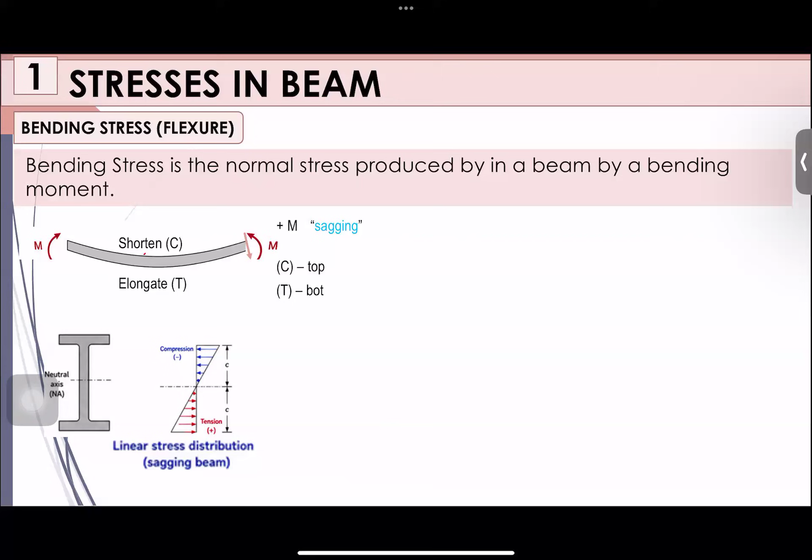A representation of our beam - we have sagging, where the beam is concave upward. On the upper portion of the beam, we have shortening, meaning the material at the top of the beam is compressed. While it bends concave upward, the bottom part of our beam is elongated or stretched.

This tends to be a tensile or tension side. So meaning, if we center on this, looking at the upper part of our beam, since it's compressed, that is compression at the top. Next, at the bottom of the beam, since it's elongated and stretched, that means that is tension. Hopefully that makes sense.

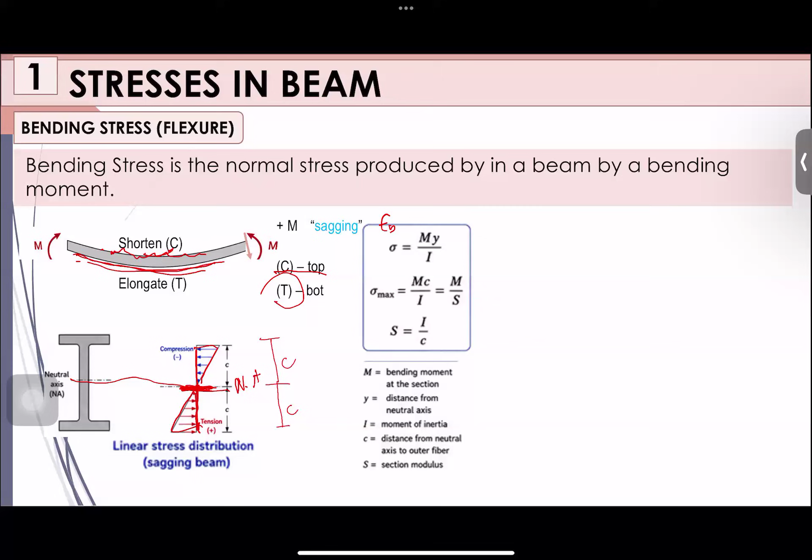So on the compression side, we have C. And also from the neutral axis to the outer fiber of the tension side, that is also a distance C. Your S there is your section modulus.

Based on the formula itself, we can say that when the value of our bending moment gets bigger, the stress gets bigger too. Make sense? Because the bigger the value for the moment, the bigger the value of the stress will be.

So in our actual design, it is very important for us to know where the maximum moment of our beam occurs. It's not just about knowing the length of the beam, or the support of your beam, or even just knowing the load of your beam.

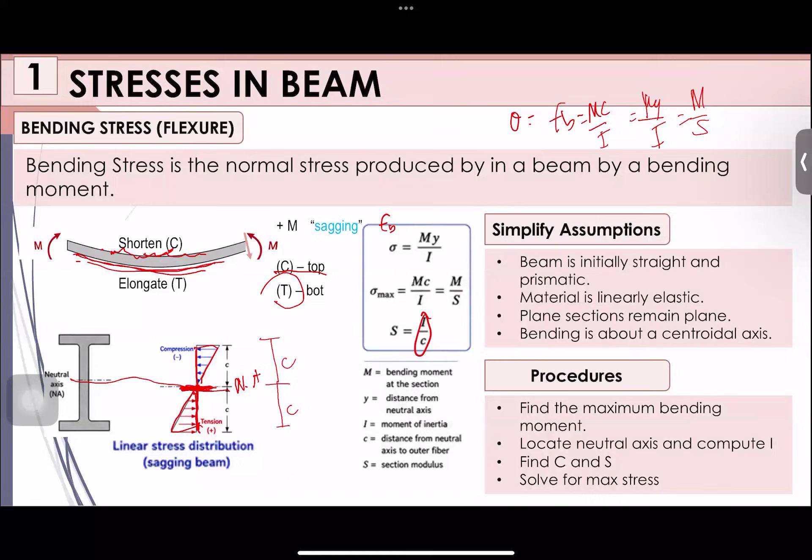Kaya because of the section modulus, pwede hindi maging mabigat yung section na gagamitin natin in engineering design of structures. Kapag hindi sobrang bigat yung material na gagamitin natin sa pagde-design ng structural members, doon na pumapasok yung tinatawag nating economical sections. Kasi as civil engineers, number one rule, kino-consider natin ang safety and welfare of the public. And aside from safety, kino-consider din natin yung pagiging economical at efficient. So we have here economic sections.

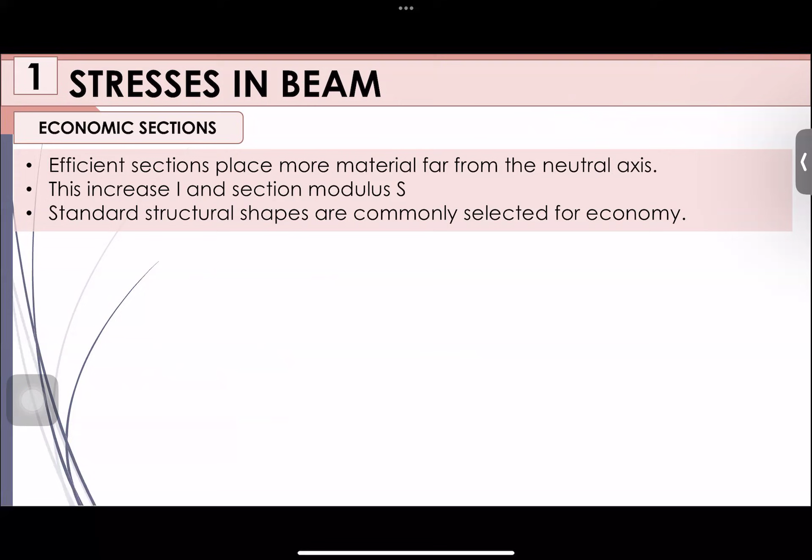Efficient sections place more material far from the neutral axis. This increases your I and section modulus S. Standard structural shapes are commonly selected for economy. So these are the different shapes for your structural member. The idea ng paglagay ng material na mas malayo sa neutral axis is para mas mataas ang kanyang moment of inertia. Kaya madalas ginagamit natin ay steel I-beams. Kung mapapansin niyo, yung mga flange ng beam natin is nasa upper section and lower section.

So again, yung flange ng beam natin, mas malayo sa neutral axis. At kapag malayo ito sa neutral axis, mas efficient, mas nare-resist nito ang bending kumpara sa beam na solid rectangular section, even though they are the same weight. Kaya I-beam mostly yung ginagamit sa ating construction. Kapag mas malayo sa neutral axis, mas efficient siya, at mas nare-resist niya yung bending kumpara sa solid rectangular section kahit pareho pa sila ng timbang.

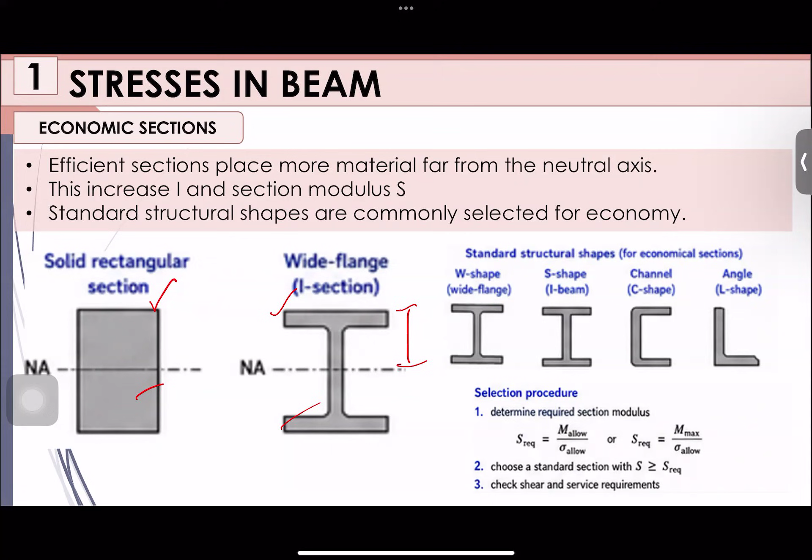Now let us try to solve some problems for bending or flexural stress. The simply supported beam shown in the figure has a rectangular cross section 120 mm wide and 200 mm high. So hanapin natin yung centroid. Rectangle yan, at ang centroid ng rectangle is h over 2, so 100 and 100. Compute the maximum bending stress in the beam. Compute the bending stress at point B that is 25 mm below the top of the beam. So first question, gamitin natin si FB. Hahanapin natin si FB max.

Number 2, no? Change natin yan, number 2. Number 2 is hanapin natin si FB or the bending stress at point B. So, paano ba natin gagawin yon? For us to know kung nasaan si maximum, first step natin dito is determine ano yung value ng moments natin. In order for us to determine the moments, gagawin natin yung shear and moment diagram. Tama? Which is yan yung ating topic before this one, topic 3 natin, the shear and moment diagram.

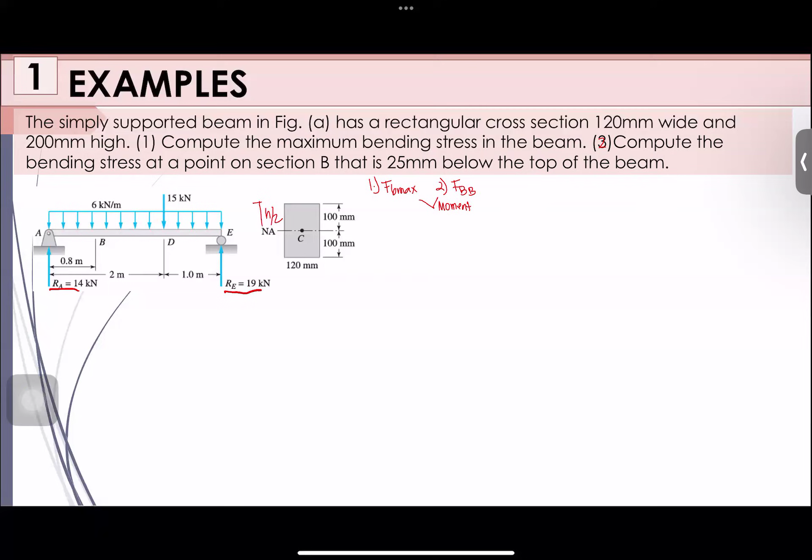So, sabi ko sa inyo, practice more problems on how to draw the shear and moment diagram, because hanggang theory ninyo magagamit ninyo yan. So, how will we draw the shear and moment diagram? Of course, solve the reactions first. So, you have the reaction at A at 14, and the other reaction at 19. To draw your shear diagram, I believe marunong na kayo nito. So, you have 14 upward. Kunin na lang natin agad sa point B na section.

14 minus 6 times 0.8. Minus because the force is going downward. Okay? So, that is 14 minus 6 times 0.8, and that is equivalent to 9.2. Now, next, at section BD naman, 9.2 minus 6 times 1.2, and that is equivalent to 2. Minus the concentrated load, which is 15. So, 2 minus 15, that is negative 13.

Run through tayo from point D to E. So, negative 13 minus 6 times 1, and that is negative 19. Negative 19 plus the upward reaction, 19, and that is 0. Therefore, that is your shear diagram. Next, let us try to draw the moment diagram. As you can see, kinakailangan natin ng specific moment at this point. So, how will we do that?

Kukunin lang natin yung area ng trapezoid na to. Kung nalilito kayo, pwede natin siyang hatiin in terms of triangle and rectangle. I-add natin yung area ng rectangle, i-add din natin yung area ng triangle. So, itong rectangle natin, at point B tayo ha, para madali tayo, para makuha na natin yung question number 2 mamaya.

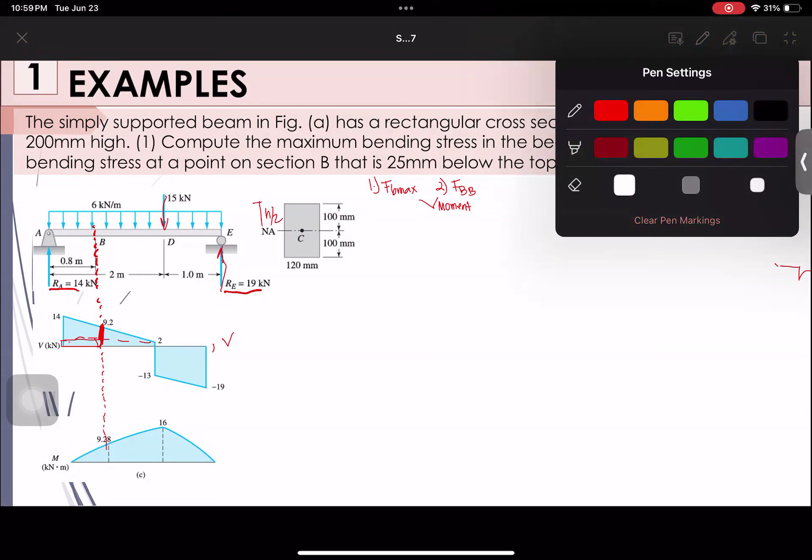Sige, I'm sorry. Nasobra ata yung paningin ko. Dapat nasa 9.2 pa tayo. Erase natin. Palitan na natin. So, nasa 9.2 pa tayo. This one, hatiin natin. This rectangular one is 9.2 times 0.8. 14 minus 9.2 for the triangle, so 1/2 times 14 minus 9.2 times 0.8. I-add lang natin yung dalawang area na to, and that is the value of our moment at point B. Yung value natin is 9.28.

Next, check lang muna natin yung values. I-add naman natin ngayon itong area from point B to point D. The same lang, this is a trapezoid. Para hindi kayo malito, pwede natin hatiin sa rectangle and triangle, or diretso na tayo sa area ng trapezoid. Ginawa ko lang yun kanina para ma-distinguish ninyo yung rectangle and triangle. But pwede niyo gamitin yung formula ng area ng trapezoid: B1 plus B2 over 2 times H.

That is 9.2 plus 2 over 2. So, meron tayong 9.28 plus 9.2 plus 2 over 2 times the height. Ang height natin is the distance, and take note, that is 2 minus 0.8. Ito lang yung distance na kinukuha natin. So 9.28 plus this area, that is equivalent to 16. Kindly confirm that one.

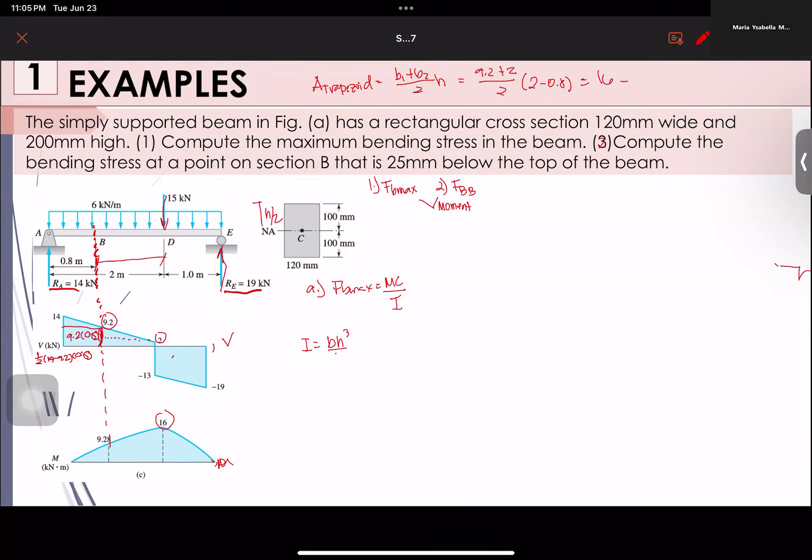And let us convert then into meters. We already know that 1 meter is equivalent to 1,000 millimeters. At ano nga ba ang moment of inertia of a rectangle? That is BH cubed over 12. So you have 0.12 times 0.2 cubed over 12. Okay? And your moment of inertia is equivalent to 8 times 10 raised to negative 5, and that is meters raised to 4.

How about your C or your centroid? Or yung ating distance from the neutral axis papunta sa outer fiber. So it's either top or bottom. Pwede yun. And this is your C. From the neutral axis papunta sa outer fiber, that is your C. Therefore, that is 100 or that is equivalent to 0.1 meters.

How about your moment? Your maximum moment is 16. This is your M maximum, and that is 16 kilonewton. So, para ma-convert natin to Pascal, i-convert na lang natin into Newton, where 1 kilonewton is considered as 1,000 Newton. Okay? So, this is equivalent to 16 times 10 raised to 3. So, this one will be 16 times 10 raised to 3 times 0.1 over 8 times 10 raised to negative 5.

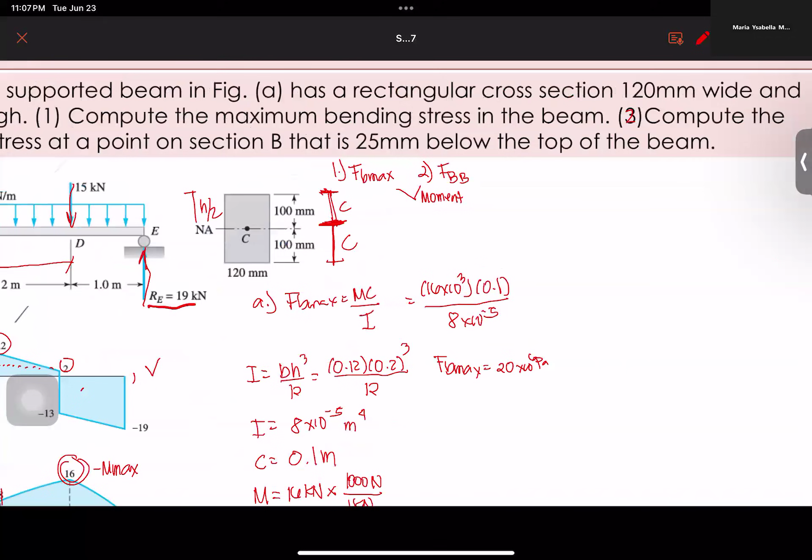And your maximum bending stress is equivalent to how much? Okay, that is equivalent to 20 times 10 raised to 6 Pascal. And then divide lang natin by 1 million, magiging 20 megapascal na lang. Sinabi ko na yun sa inyo paano i-consider ang ating units. Move tayo kay number 2.

So, compute the bending stress at section B that is 25 mm below the top of the beam. So, kung ito na yung ating beam section, we have 120 millimeter wide and you have here your neutral axis, and the C from bottom to the neutral axis is 100 mm and also from the top, that is also 100 mm. But take note, at section B, ang hinahanap natin is yung bending stress 25 millimeter below the top of the beam. So, from the top of the beam, bababa tayo ng 25 mm.

So, ito ba yung hinahanap natin na bending stress? Hindi yung 25 millimeters. Sabi natin, yung designation ng C ninyo is always from the neutral axis papunta sa outermost fiber. So, inalis nyo naman tong 25 mm. Ibig sabihin, what we're considering is 100 minus 25 mm, equivalent to 75 mm. Ito yung section na tinatanong sa atin, hindi yung 25 mm mismo. So, from the neutral axis to the fiber, ito lagi yung C natin.

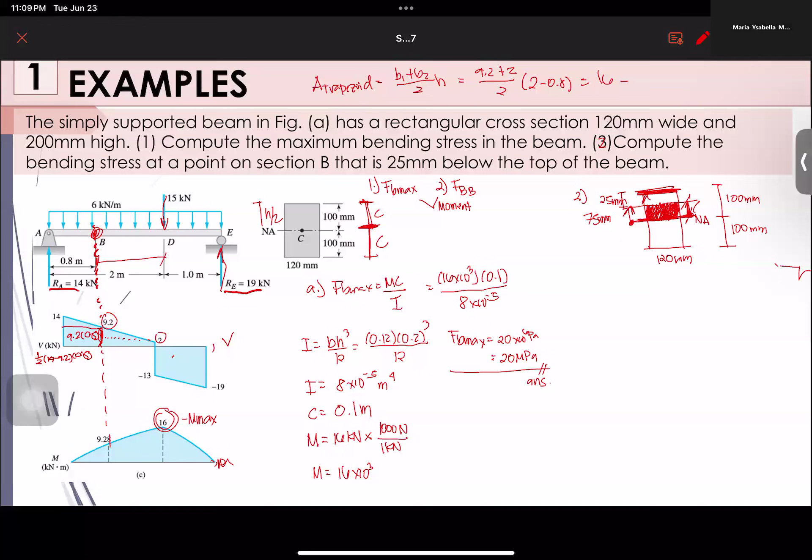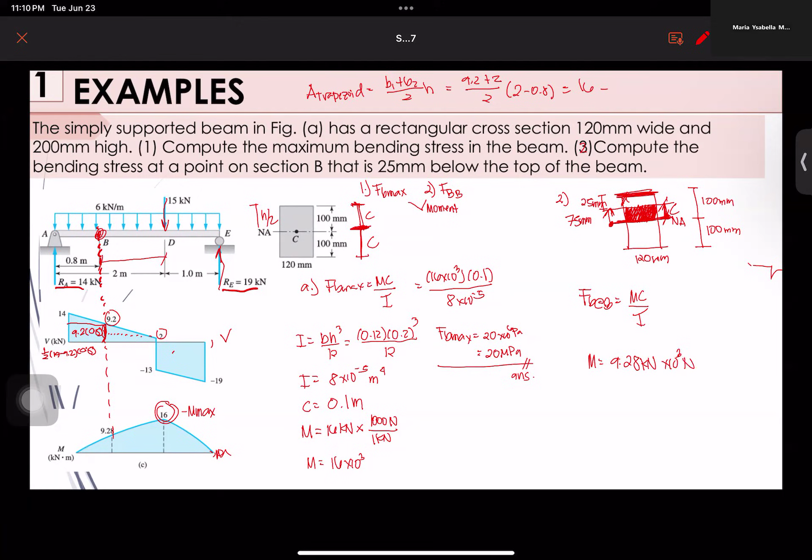So, that is FB at B. That is MC over I pa rin. Where your M now? That is 9.28 kilonewton, times 10 raised to 3 para maging Newton. So, moment is equivalent to 9.28 times 10 raised to 3 Newton. Ang ating moment of inertia, nagbago ba siya? Hindi naman nagbago. Kinonsider lang natin yung other part of your beam. So, it will remain the same, 8 times 10 raised to negative 5.

Hindi naman sinabi na kinat yung beam natin. Kapag pinutol yung beam niyo, which is imposible, kasi bakit mo ikakat yung beam, magbabago yung ating moment of inertia. But in this case, hindi naman nagbago. Ang nagbago lang is yung ating C, and that is equivalent to 75 mm or 0.075. Okay? So, kindly compute this one. Input nyo yung data.

Okay, and that is equivalent to 8.70 times 10 raised to 6 Pascal, or divided by 1 million, 8.70 megapascal. Ito na ba yung ating final answer? If your answer is 8.70 megapascal, that is wrong. But if your final answer is 8.70 compression, or negative 8.70 times 10 raised to 6 Pascal, that is your correct answer. Ma'am, paano siya naging negative? Di ba positive yung moment?